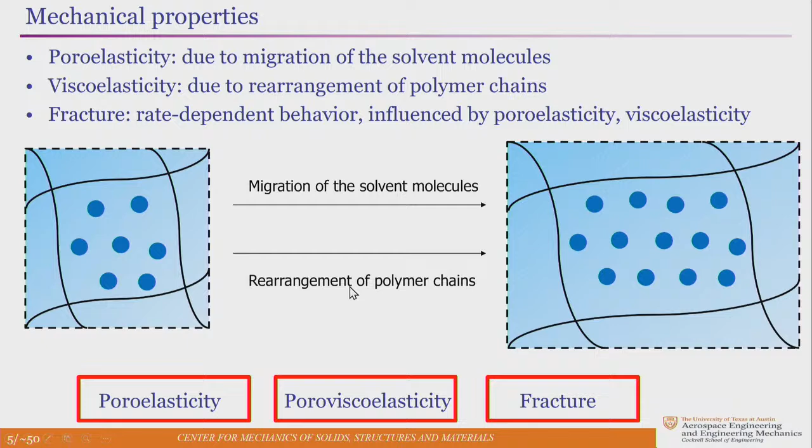There are two time scales in this process. One is the time scale of migration of the water molecules, solvent in general, and the other is the rearrangement of the polymer molecules through viscous processes.

On the horizontal axis, I've drawn time normalized by the viscous time scale. If you're in the very short time scale, the viscous processes are not resolved. They're still going on, but if you wait long enough, the viscous processes have completed.

On the vertical axis, I have a length scale and the diffusion time scale - diffusion occurring in the viscoelastic time scale. So if you're at short length scales, diffusion can complete itself and your poroelasticity is fully resolved. But if you go to very long specimens, poroelastic diffusion hasn't completed, and you'll have an effect based on that. If you're at intermediate length scales and time scales, you have a coupling between what happens in porous flow and what happens in viscous deformation.

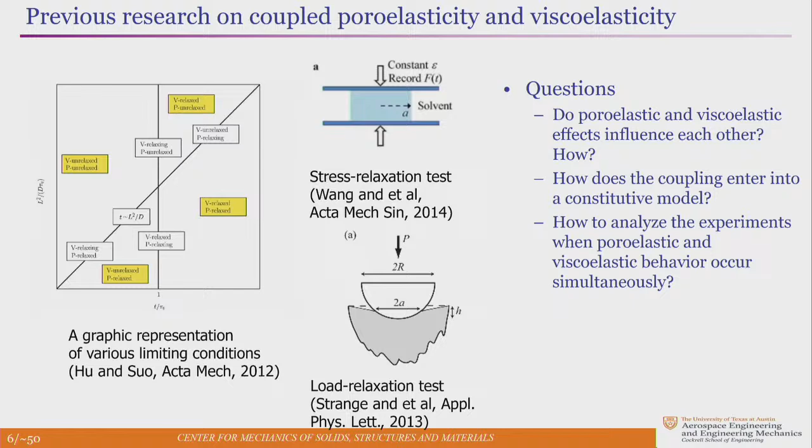People have looked at characterizing this through a number of different experiments. One is to do a confined compression, let the solvent come out and hold it while the stress relaxes, the pore pressure relaxes as the solvent migrates out, and then do an inverse calculation to see what the poroviscoelastic properties are. Similar thing with an indentation with a spherical head and so on. All of these are very difficult experiments to perform, very difficult to diagnose, and harder to interpret because you always need a model to figure out what's going on.

We decided to do something very simple: do uniaxial tension and diagnose it with image correlation methods so that you can monitor the strain as a function of time, and then do a coupled experiment with viscous deformation as well as porous diffusion and see if we can resolve what's going on where.

So the idea is to take a chamber and control the humidity in the chamber. We're not going to put the specimen immersed in the solvent. We're going to put it in a humid environment where the solvent is not in liquid form, but in vapor form outside the specimen, while it's in liquid form inside the specimen. So we control the temperature and humidity in the chamber.

And then we put two specimens in there, fixed at one end with a dead weight hanging on the other to allow it to creep. The two specimens experience the same thermal and humidity environment, but the one on the left side is going to swell or dry depending on the humidity levels. At a certain point in time, we add a load on it to start the creep process.

The specimen on the right side is going to be a control one, which is just exposed to the humid environment and temperature, but no mechanical forces on it. By comparison of what happens to these two, we should be able to extract out what is poroelastic and what is viscoelastic.

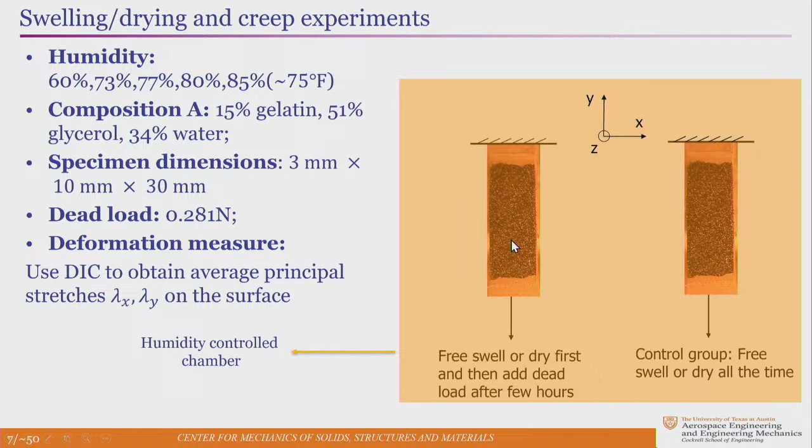So some results from this experiment. The first one is at a relative humidity of 73% in the chamber. We have two sets of results. The dashed lines correspond to the witness specimen that is subjected only to the hygrothermal environment. So at 73% relative humidity, the specimen doesn't really swell. It doesn't elongate, it doesn't widen, it just maintains its total. You can think of this as the stretch lambda y. It doesn't change much from 1. At this time instant, about 70 hours or so into the process, the second specimen was loaded by a dead weight.

A weight of 0.281 newtons, I think. There's an instantaneous elastic response. You add a weight, it stretches by its current Young's modulus, and it contracts in the width direction. With time, it exhibits a creep strain, and this is the creep process.

If you change the relative humidity and make it 60%, there's not enough water in the chamber. The water contained in the specimen is larger, and it ejects the water out into the chamber, and the specimen is drying. This is what we do in Chennai when we put our clothes out to dry.

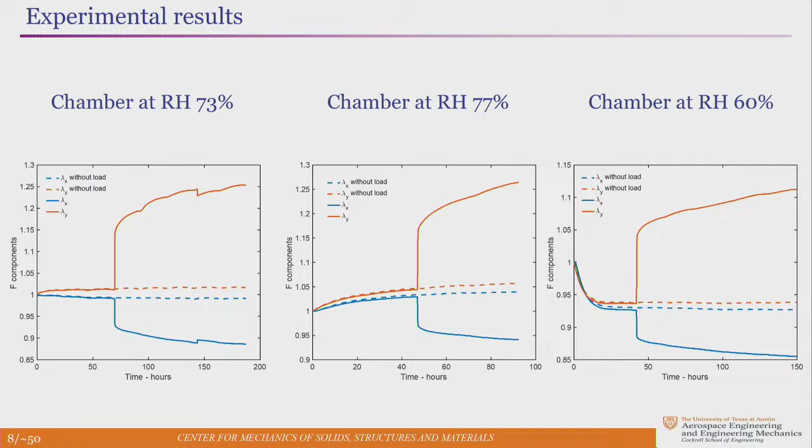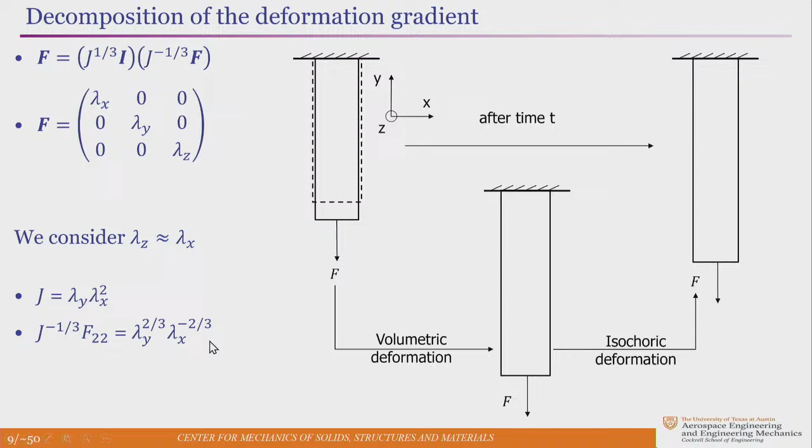But if you decompose the total deformation into two parts, one that is volumetric and one that is deviatoric, you can take the deformation gradient tensor - lambda x and lambda z are the same, lambda y is the stretch in the vertical direction. You can decompose it into a volumetric part and a deviatoric part, and then see what happens. A simple calculation shows the volumetric part is lambda y lambda x squared, and the deviatoric part is lambda y to the 2/3, lambda x to the minus 2/3. But magic, everything resolves itself if you do this in this particular representation.

This is a very dense slide, has lots of information in there. I'll walk you through it. On the left side is the volumetric deformation as a function of time for about 80 hours. The dotted lines correspond to the specimens without any mechanical loading, only thermal, hygroscopic loading. The dotted line here corresponds to a relative humidity of 73%. The volumetric deformation doesn't occur. There's no swelling, there's no drying. The specimen is in hygrothermal equilibrium with the moisture outside. There's no diffusion going on at all.

This specimen is at a lower humidity outside, it's drying, and these are all swelling at different rates depending on the outer humidity, larger than 73%. The solid lines are the corresponding results for the specimens in which load was applied at about 25, 30 hours or whatever it was.

You don't see any trace of that in the volumetric response. Adding the extra load, the additional deviatoric deformation, has done nothing to the swelling problem, meaning that the swelling or volumetric deformation is completely poroelastic and it has no viscoelastic effects whatsoever.

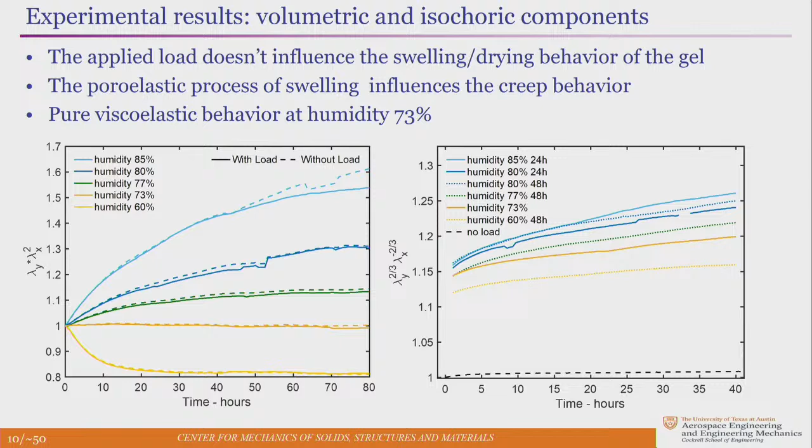And this particular level of humidity, 73%, there's no swelling, there's only creep. That's the pure viscoelastic response, unadulterated by the moisture diffusion process into it. So this is it. Now we need to create a model to represent this behavior that says swelling is going to be completely poroelastic, shearing is going to be completely viscoelastic.

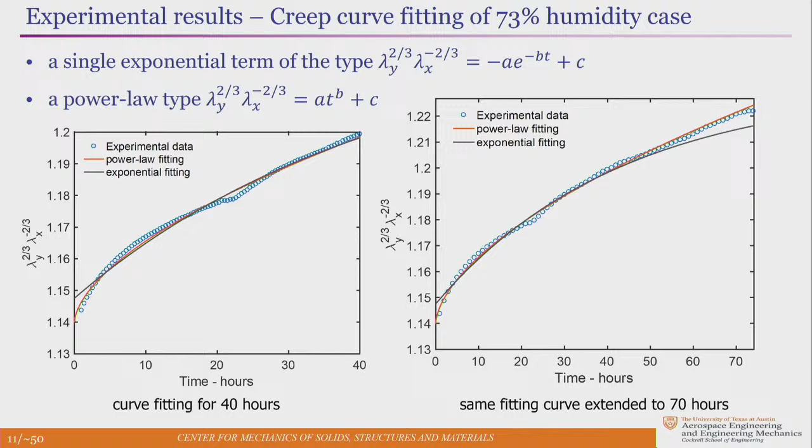What kind of a constitutive model can capture this? It's going to be some heavy continuum mechanics in here, but let me see if I can walk you through it fairly quickly.

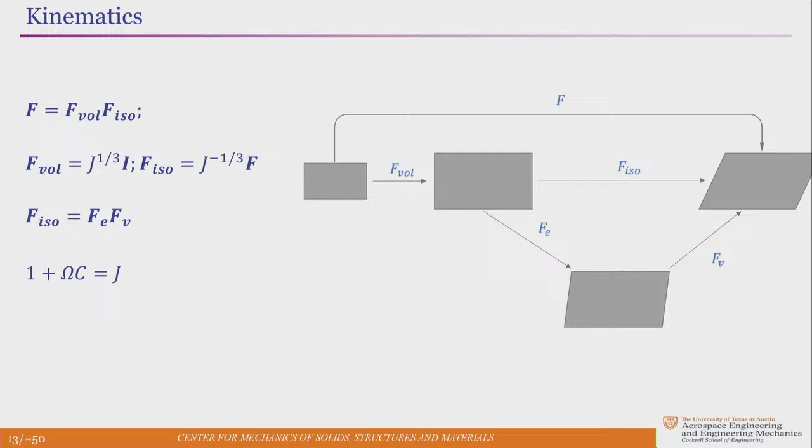All of the volume expansion occurs only by the fact that it's absorbing water molecules from the atmosphere. So the Jacobian of this transformation is going to be 1 plus the volume of the water molecule times the concentration of the water molecule. The total amount of water molecules that go into the specimen will dictate how much the specimen has swollen.

So we use what's called a two-potential formulation for viscoelasticity, poroviscoelasticity. We use two functions, basically. One is the free energy density of the body that depends on the deformation, the total deformation, the concentration of water molecules in the solid, and the amount of viscous deformation that occurs at any given time. The second one is called the dissipation potential, and this accounts for how much energy is being taken away from the system. And this depends on the viscous part of the isochoric deformation gradient, as well as the rate at which that viscous part occurs, because this is a time-dependent, rate-dependent process.

The two are coupled with a consistency condition saying that whatever energy is recovered from this by the viscous deformation process must be dissipated by this one, because there's no way to destroy the energy that is created by this viscous process.

Conservation of linear momentum gives you this equation, where S is the second Piola stress, and the mass balance gives you the Darcy type equation. The rate of change of the concentration and the flux out must balance each other with suitable boundary conditions.

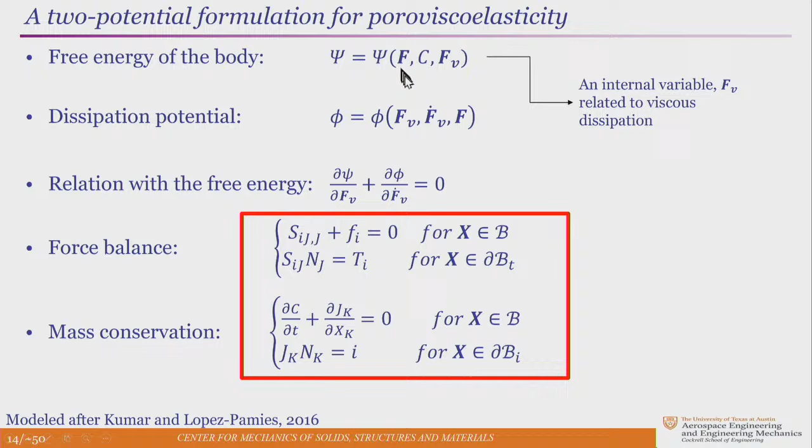On top of this, we need constitutive relations to connect the deformations F, FV, and etc., and the stresses. And this comes by using the second law of thermodynamics, saying that the net dissipation must be non-negative.

That gives you a definition of stress, that the gradient of the free energy gives you the stress. The gradient of the free energy with respect to the concentration gives you the chemical potential.

This says that the net flow must be in the direction from high concentration to low concentration, but that gives you a definition for the net flux in terms of the gradient of the chemical potential through a tensor, that is the mobility tensor, or the diffusion in 3D for this material when it's in the reference configuration.

At the deformed configuration, which is where the flow occurs, you use just a standard diffusion model based on a diffusion constant times the gradient of the chemical potential in the current, deformed configuration. You map it back to the reference configuration, and it becomes anisotropic, so that the diffusion in the direction of tension is larger than the diffusion in the transverse direction, and so on. But those are things that can be managed in the framework of finite elasticity.

So that's the general framework for forming the boundary value problem, closing the system with constitutive equations. We need to find specific forms for the free energy density function and the dissipation potential.

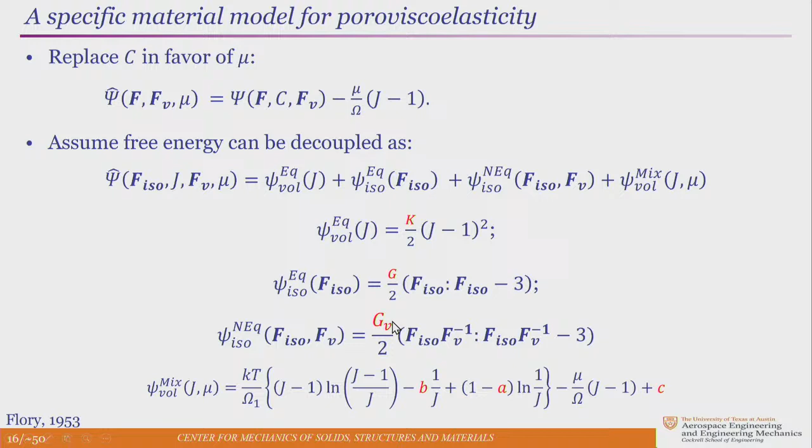So there's a spring, and a spring-and-dash part, in parallel. G is the spring constant for the sole spring, and GV is the spring constant for the spring-dash branch of it, and so on.

The dissipation potential has a particular form. It's derived from a velocity-dependent function, but it has one material constant that defines it. This is the viscosity of the branch.

So the ratio of the viscosity of the dash side of the branch and the shear modulus of that same branch gives you a time constant. This is the viscous time constant of the spring-dash model. It's written in terms of the right Cauchy-Green stretch tensor, or the rate of the right Cauchy-Green stretch tensor.

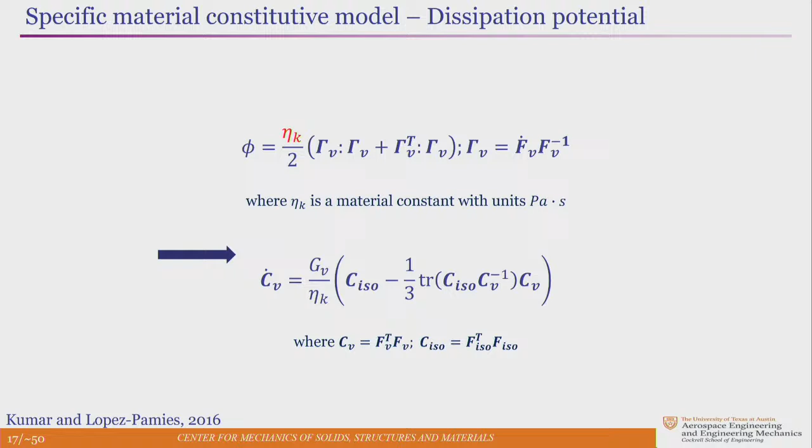We're keeping everything within the framework of finite elasticity because of finite deformations, because the stretches, when the swelling is large, maybe in the range of 30 to 50%, and when it dries out, it can be even larger than that.

This is something I'm going to skip.

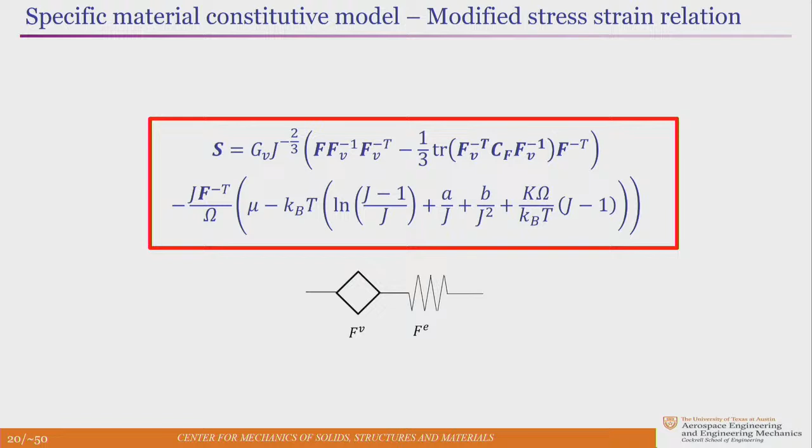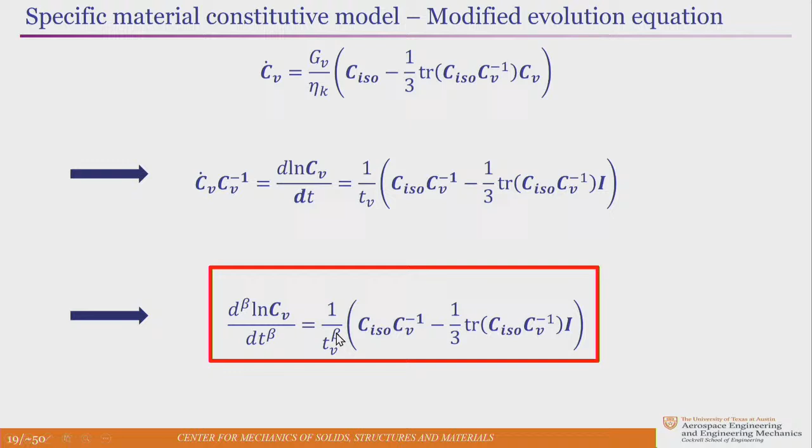Viscous time constant tau, to be calibrated. The term beta is also to be calibrated to give you the right power law viscous creep response.

All right, so that comes with the set of governing equations. The first one is the work done by the stress. This is the work done by the external body forces. This is the work done by the external tractions. These are work rates. So that's force balance, or energy work balance, written in a weak form in terms of the test functions.

This is the diffusion equation, or the mass balance equation. The term with t is the value of the Jacobian of the flux at time step t, and everything else is at time step t plus 1. So we've written an incremental form of the mass balance equation, and this is the equation for evolution of the viscous strain through the fractional derivative model.

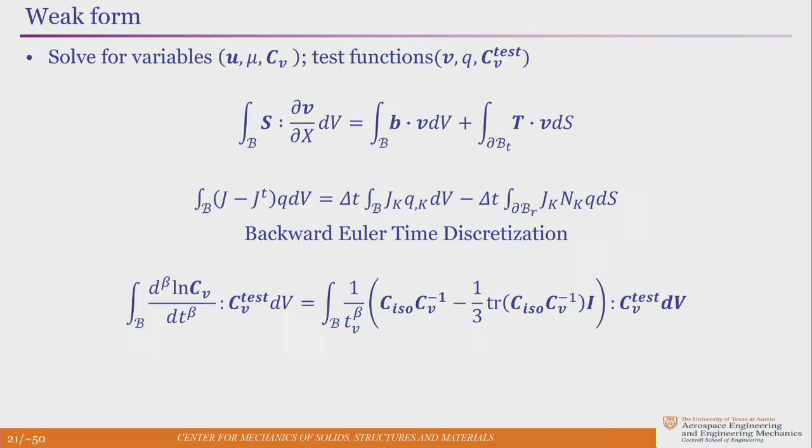So there's a ton of material parameters in these models: things that describe the free energy, things that describe the dissipation potential, things that describe the fractional derivative evolution of the viscoelastic part, and so on. So the question is, how do we calibrate these constants?

First thing to do is to implement this numerically in a framework. We did that within what's called FEniCS, an open source general purpose solver, where all you do is provide your governing equations. It has the infrastructure to discretize it and do the solutions.

But we do need to look for stability of these solutions, and in order to do that, different kinds of discretizations are used for different functions. The displacement field is discretized by a second order Lagrange interpolation function. Chemical potential is discretized by a linear function within the same element. And the internal variable, this viscous component of the strain, is considered to be constant in each element.

That means there's a discrete jump between the strain rate in each element, and it turns out this is the one that leads to a stable solution procedure. It's well established, and so we use that.

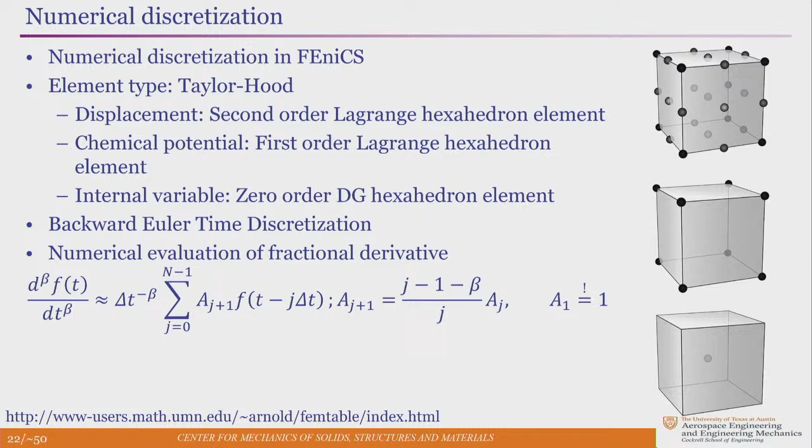Backward Euler time discretization for the diffusion problem or mass balance problem. The numerical evaluation of the fractional derivative is a big challenge because it needs information at every point from all times previous to the current time. So it's a large storage requirement, but it's something that can be handled in modern computers.

Initial and boundary conditions are important. You need to describe the chemical potential state of the specimen, meaning how much water is contained in the specimen at the onset. And then the other boundary conditions are based on displacement and tractions for the forces, and for the chemical potential, fluxes for the water content.

There is an interesting thing that happens in the boundary condition for moisture flux. If you think the chemical potential in the interior of the specimen is constant, the chemical potential is going to have a gradient as it approaches the free surface. It cannot be a step function jump across that. And the chemical potential on the outside, let's say, is at some uniform value.

The exchange between these two: you can use a Dirichlet boundary condition which says that the chemical potential here must be equal to the chemical potential... I lost my feedback.

Okay. Can you hear me?

The chemical potential at the boundary must be equal to whatever it is on the outside, right? That's the Dirichlet boundary condition. Or you could have a flux condition saying that a certain amount of moisture is either being ingested or extracted from that surface. Neither one of those is true for this swelling drying experiment.

We have liquid water here, we have vapor here, and so it has to have a solidification or condensation and then a diffusion process, which is going to take some time. This means the boundary condition is going to be more like a heat transfer condition, or a Robin boundary condition, where the flux is proportional to the difference in the chemical potential.

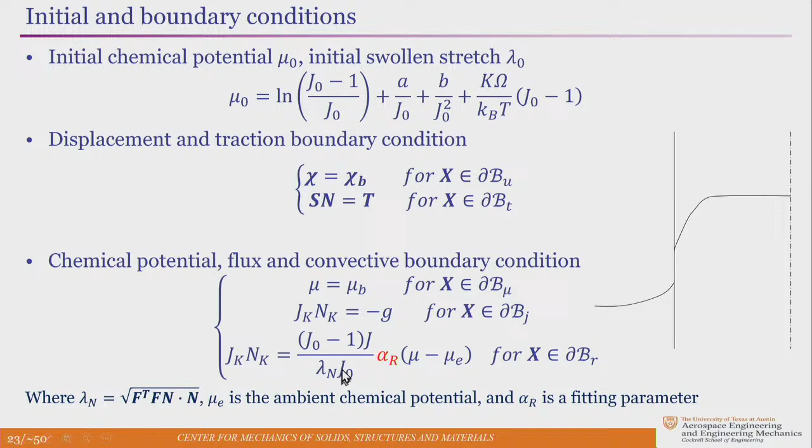So it's more like the flux proportional to the difference in the chemical potential. That brings in another constant into the material model, and all of these other things here are to account for the large deformation problem involved. So we have a code that has all of these material constants to be calibrated, and it could be solved for whatever the boundary value problem is.

So we did three cases. First one: don't apply any load on it, just the diffusion problem. The second one: apply a load but keep the chemical potential constant so that there's no water exchange, making it just a pure creep problem. And finally, the mixture of the two.

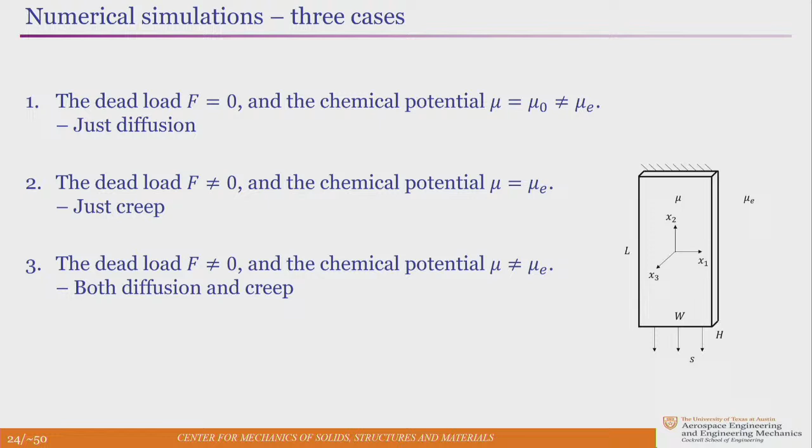Luckily, we know how to do these things because the first one is easy: don't apply any load on it, it's just diffusion. The second one, we have found a way to do this by saying if you keep the chemical potential at 73%, there's no moisture exchange between the specimen and the surroundings, so it would be just the pure creep problem, and so we could do that. In the interest of time, maybe I still have some time, right?

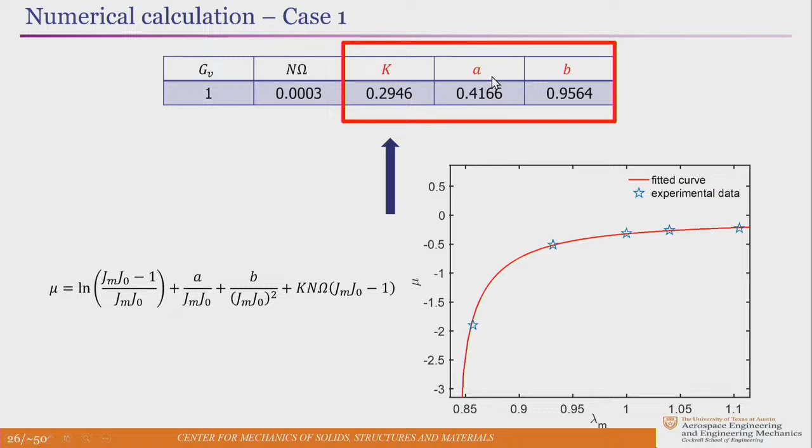The stars are experiments. The line is the calibration curve that passes through. As a result, you calibrate the bulk modulus K and the two constants in the Flory mixing model for the free energy, and so you can calibrate those constants.

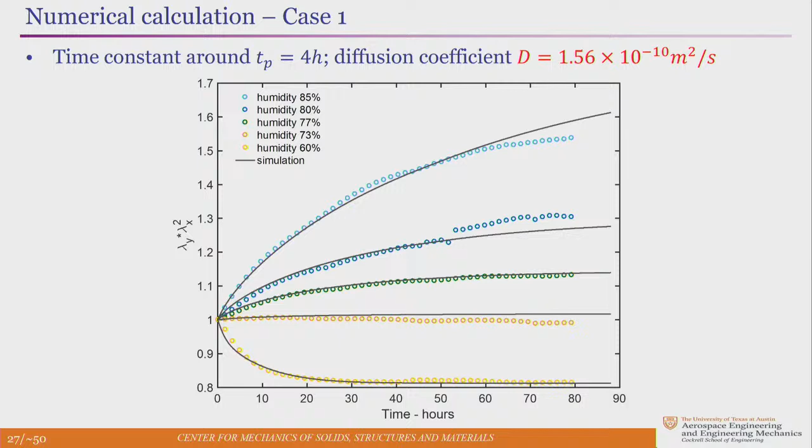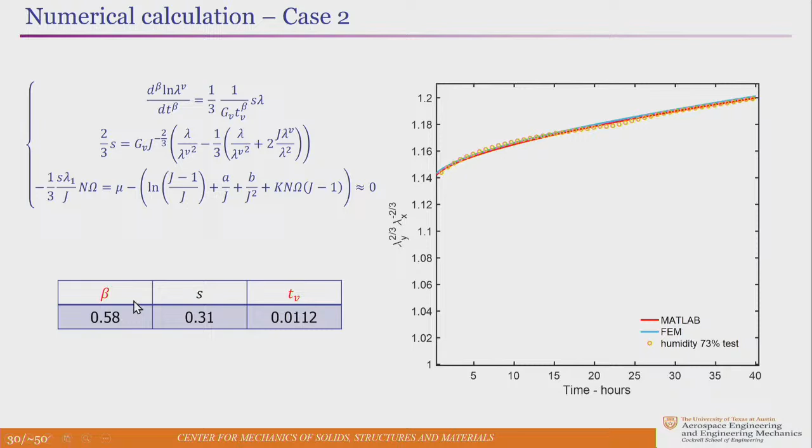So we've calibrated all of the material properties. There's one more thing to do for the cases when there's both mechanical loading and hydro loading—could we represent everything? And it turns out you can.

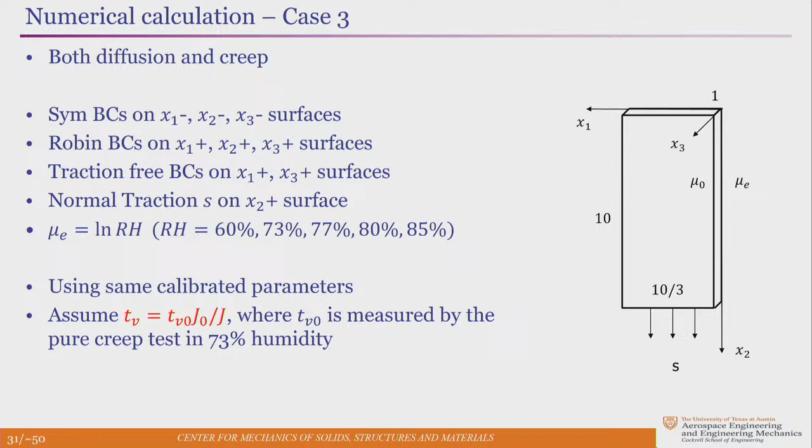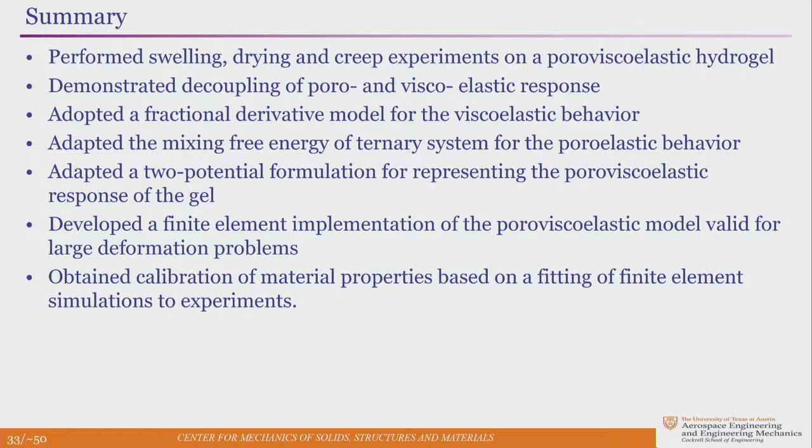How much time do I have? Ten minutes. Okay, that's the poro-viscoelastic story.

Now there is a fracture part to it. What happens when you take this material and subject it to loads that generate cracks? In the interest of time, I'll forego the history, except to say the main idea behind fracture of these specimens is that there's a process zone created near the crack tip, and this process zone could be influenced by both viscoelastic and poroelastic processes.

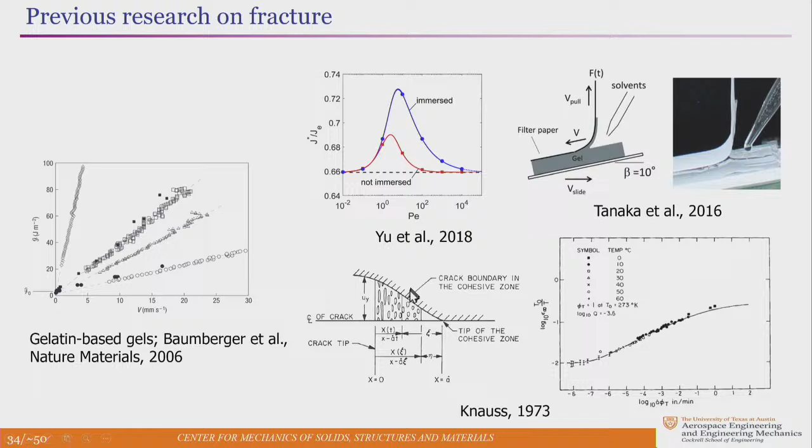Diffusion of water into or out of the crack region, into the process zone, should have some effect on the rate at which the cracks grow.

So first, some experiments. This time we use what's called a pure shear experiment for strange reasons. The idea is you take a strip of this material, clamp it between two rigid boundaries and displace them vertically, insert a pre-crack in there, and then let this thing do whatever it wants to, diagnose it, and figure out what happened to extract fracture properties.

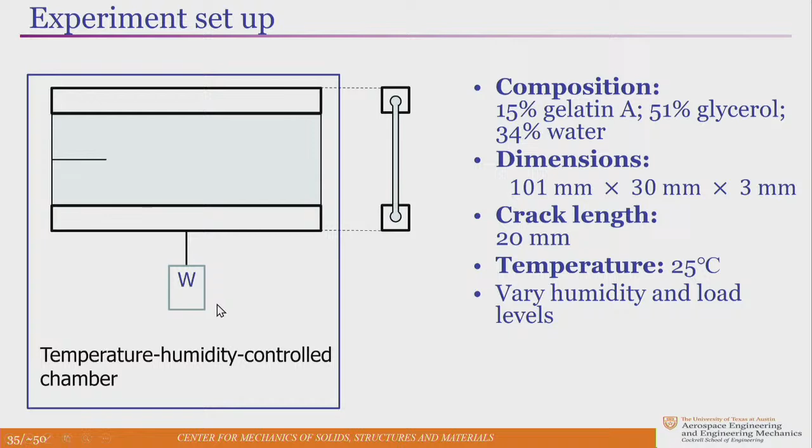What we did was, instead of driving it at constant rate, we applied a constant force on it so that the process would be one of creep, viscoelastic creep, and then poroelastic diffusion. We decorated the specimen with titanium dioxide particles, and you can see what happens.

So I'm going to distinguish between a number of different cases of loading. They're all in a constant humidity environment, dead weight loading, but in this case the relative humidity was smaller than the equilibrium humidity of the specimen, and so the specimen is going to dry over time.

And if I load it, there's an instantaneous elastic response. There's some creep. That time scale went from a few seconds to now about 60 hours. Nothing happens—the crack doesn't grow. In fact, the specimen shrinks and just hangs on elastically forever, until the specimen degrades, I suppose.

On the right-hand side, it's the same specimen. It's at a humidity that's in equilibrium with the specimen, so there's no diffusion. But it's at a slightly higher load, and what happens here is as soon as the load is applied, it reaches critical state and the crack starts to grow.

Now in this specimen, because of a dead load, as the crack increases, the work done by the weight increases, the crack continues to be loaded, and so it runs away. Now these are all accelerated—they're moving at microns per second, microns per minute. They're time accelerated.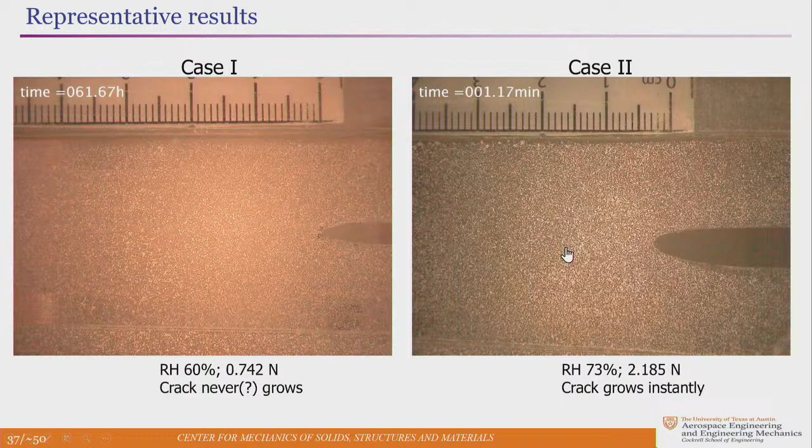So this totally took about 5 minutes. These are two ends of it. One, there's no cracking whatsoever, and here there's instantaneous response. The instantaneous response would indicate that the poroelastic effects are going to be minor, because the time scale for diffusion was on the order of hours or days, and in a matter of 2 minutes, it's not going to diffuse the water anywhere. It can create forces because the water is in a non-equilibrium state, but it's not going to create any energy there.

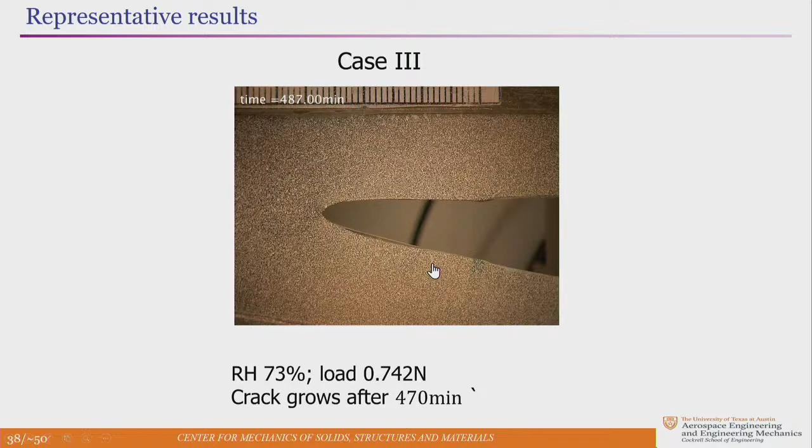The last one is what I've labeled case 3, at equilibrium humidity. So again, there's no poroelastic diffusion overall, but the load is such that the crack remains stationary for about 470 minutes, and then it starts to grow, and it grows fairly rapidly. In the next few minutes, it goes over the entire length of the specimen. So as you increase the load, the crack starts to grow sooner and sooner, but as you decrease the humidity, the crack growth rate keeps dropping significantly.

So that's all the experiments are going to tell us. They're going to allow us to calculate some deformation fields and basically energy flux and things like that, but we need a model in order to proceed further to interpret what went on in those experiments.

5 minutes? All right.

So we resort to something called Schapery's theory for viscoelastic fracture. The original specimen is subjected to some stress state at every point, displacement state, and there's an energy distributed at every point based on that deformation state. And it's subjected to some tractions, forces, external loading. What Schapery suggested was that corresponding to this, at every instant in time, there's a reference elastic problem to which you can map everything by simply assuming that the reference state is going to be some viscous manipulation of the current state.

In the particular experiment that we did, and this is the reason we chose that, it's a traction-controlled experiment. Forces were prescribed, not displacements. And in this case, for a two-dimensional problem, there's a rigorous theory that says the stress fields are exactly the same in the current state and in the reference elastic state. So the reference elastic state stress is the same as the current state in the actual specimen. But the displacements in the reference state are related to the displacements in the current state by a convolution integral that incorporates viscoelasticity.

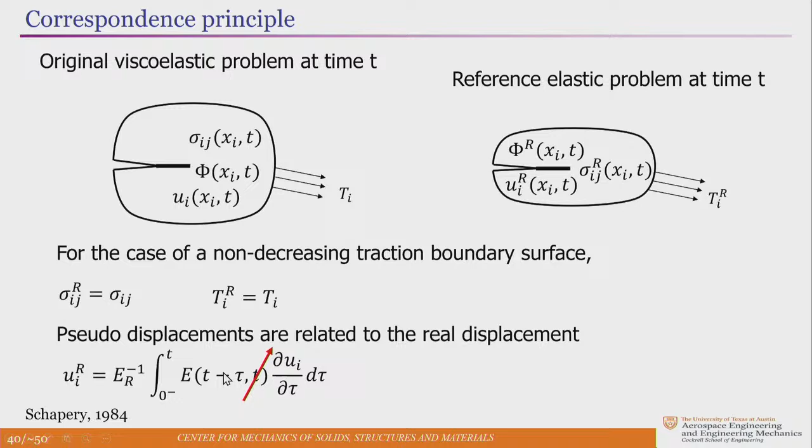You could incorporate any viscoelastic model into this particular thing. We've just used a linear viscoelasticity because we're going to apply this at the far parts of the specimen away from the crack region.

The upshot of this is that you can create what's called a contour integral, where if you take this product of your field quantities and integrate over a contour that starts at the bottom of the crack, goes around this crack tip, and comes onto the top of the crack tip, it's independent of the path along which you make this calculation. So you take one path that is far away from the crack, and you evaluate based on the displacement measurements that we've made using the image correlation method, and you can calculate this integral at the far field.

But if you take another contour that's right along the fracture process zone, you could do another similar integral, call that J sub f, and it can be represented as the work done by the tractions that appear only on this line. So this is something that, and the two are equal. So if you measure far field displacement and strain quantities, you can calculate what happens in the fracture process zone, and that's the thing we use to characterize the connection between the applied load, represented only by this far field elastic integral, and the local dissipation, represented as the work of fracture.

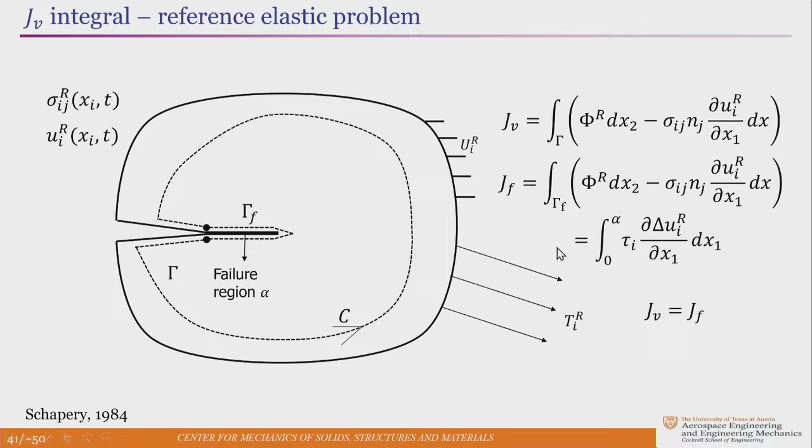We extract that in terms of the measurement from the far field.

I'm going to skip through these and show you what that final result is.

That effective integral JV, the flow of energy from the outside into the crack tip region that's dissipated there, is here in units of joules per meter squared, and the speed of the crack measured is down here. Both of these are measurements. These J calculations come from calculating the stress and strain field everywhere in the specimen along that contour, and the velocity measurements are from finding the position of the crack at every time instant.

And they all collapse. It doesn't depend on the magnitude of the loading, the humidity state, and so on. They all collapse into one curve, if you squint your eyes a little bit. This now is a failure criterion for the viscoelastic part of the material response. Because we've done these experiments at different humidity levels, the poroelastic effect, if it is embedded in it, is included in the JV, but it seems there's no systematic variation, so we think the poroelastic aspect of the fracture energy is not a large contribution to the overall fracture process.

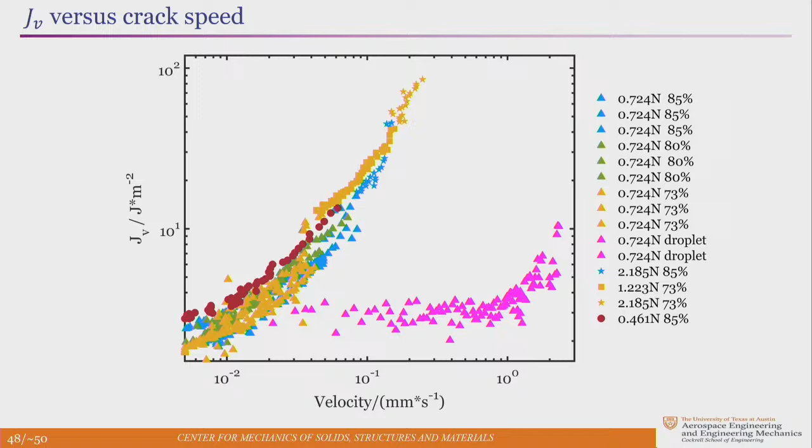We can do the same calculations of the J integral for this process, and this is what happens. It's the same material, but now it's weaker. For the same value of the driving energy, it's going faster, meaning the fracture process zone is dissipating less energy. So you can influence the fracture energy by controlling the moisture content in the process zone, not in the specimen in the far field - that diffusion is slow, but this ingestion is faster.

All right, with that, let me stop and say I've tried to give you a very quick tour of a couple of aspects of poroviscoelasticity and fracture, much of it driven by a mechanics calculation. I hope you found that interesting. Thank you.

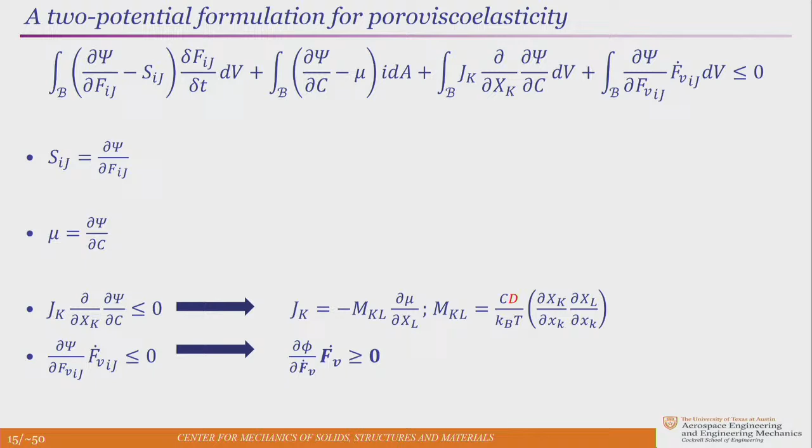Okay, so this is more of a curiosity. Going back to the cracking experiments, you had rather large dissipation energies. Right? So that's ductile fracture.

No, it is not. There's no notion of plasticity here at all. There are inelastic strains that are part of the viscous branch, but there's no notion of plasticity. Yeah, that's what I wanted to know. Thank you.

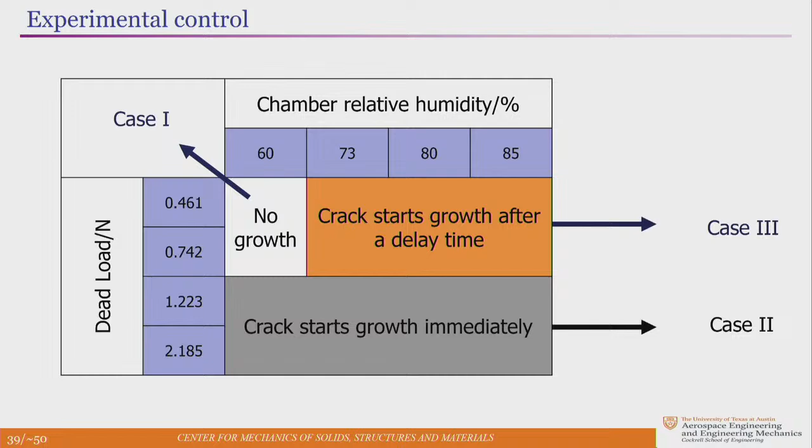And again, the reason why this water accelerates the crack - any conjecture, any hypothesis - is that you've allowed water to come in contact with the fracture process zone. It infiltrates into the process zone fairly easily because it's liquid water, not vapor. And it lubricates, it swells, it allows greater mobility for the molecules. They unravel, and the crack process speeds up as a result of that.

Is there an effective opening mode because of the swelling, you think? No, the energy required to move the molecules is now lowered because its mobility is greater. So it's just the mobility, that's the only influence you think. Okay, right.

Hello, so I was wondering, in the last slide, when you put this water in the crack, are you planning to use some other liquid? Because if the liquid is more viscous, there will be a lag between the crack tip and the water tip. It's a good idea, but we haven't done it, because here there is no lag between crack tip and the fluid, but with high viscosity that might be the case.

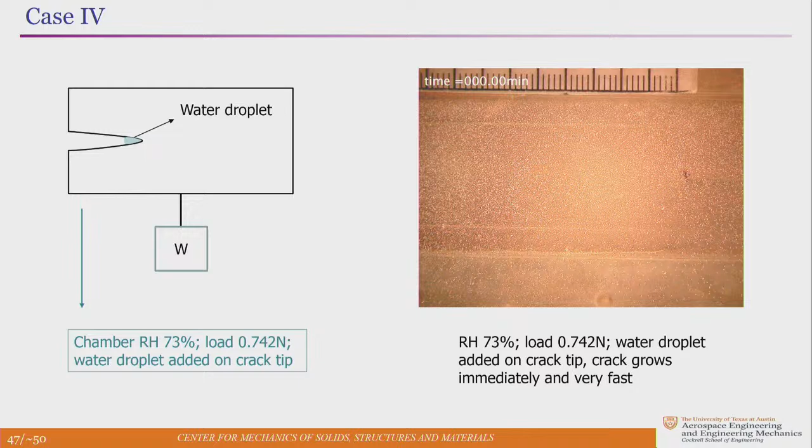This is a 3-component system. It has water and glycerol already in there. Water is low viscosity, so it's easier to infiltrate, and it's going to be a greater lubricant to make the molecules move faster. If we put glycerol in there, it's going to take a longer time period to infiltrate into the process zone, so I think the effect may be clouded more into the viscous process and not as easy to unravel. Okay, yeah, thank you. But it's a good thought - we'll think about doing some experiments in that direction.

Any particular reason why you chose glycerol? I mean, just with water, couldn't that have been possible? Yeah, I mentioned why we use glycerol - I missed that part, could you repeat? These experiments were done over a period of a week at room temperature, so there was concern it was food for local bacterial colonies, and we didn't want them to eat up our specimen. It also controls the viscosity of the overall mixture, so a couple of reasons for it. All right, thank you. And maybe a third one is in practical use, they always use glycerol as an agent for making the flow characteristics slower. Yes, thank you.